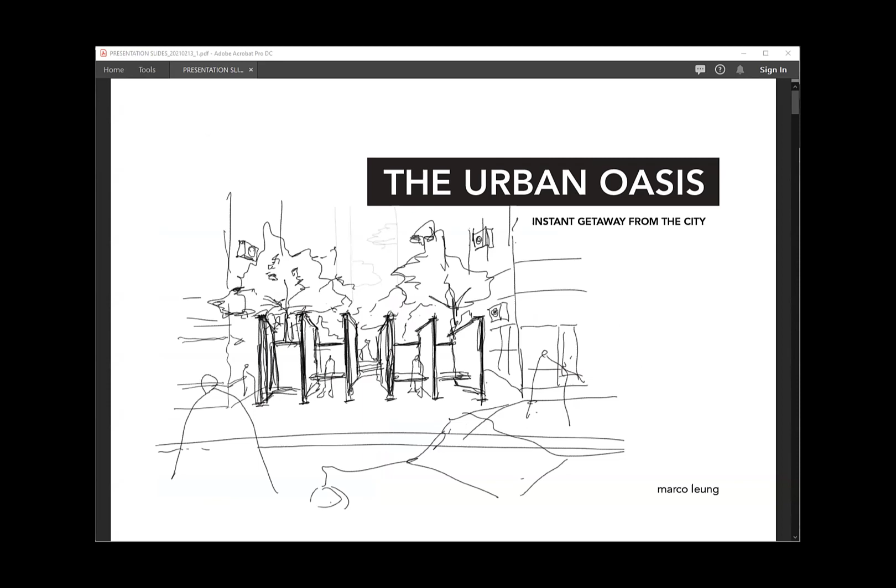I'm happy with this project since it gives me an opportunity to look into creative solutions for some spatial problems in Hong Kong, which have been on my mind for a long time.

Green space is precious in the urban context of Hong Kong, and yet to me, most of them didn't function well as a respite in the city. The chosen site is a good example of this issue.

For people who aren't so familiar with Hong Kong, this is the map. The marker indicates the location of the site, which is also one of the most high-density areas among others.

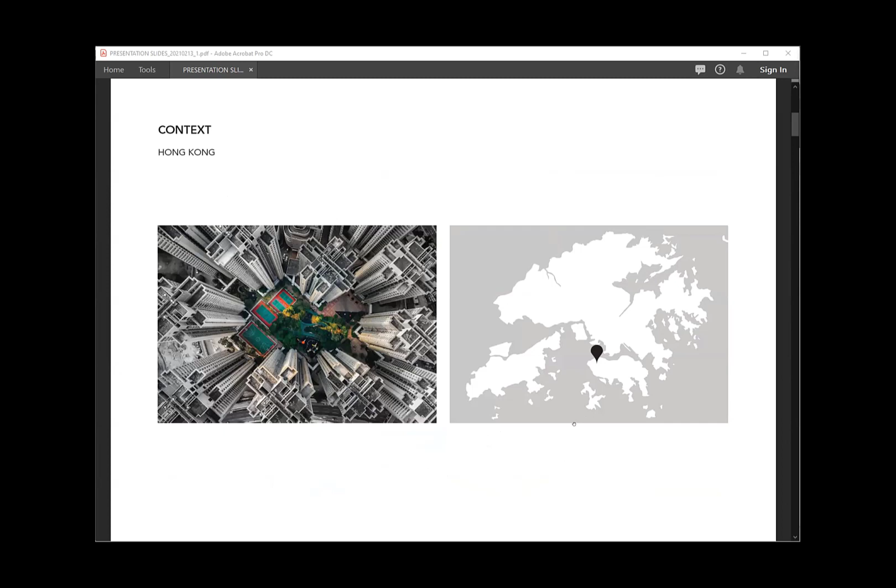The first thing about the site is it's surrounded by buildings 100 meters or taller in all directions, and the site suffers from a lack of daylighting.

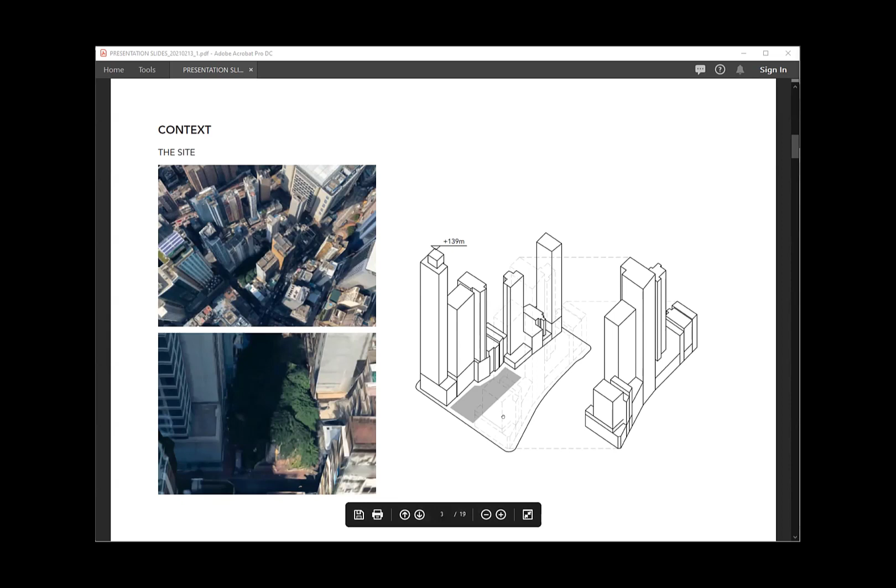You can see how the existing park is situated within the building lot and surrounded by service alleys, which are the back-of-house areas of the surrounding restaurants and shops.

So the space within is a bit unpleasant due to exhaust gas, food smells, and loud noises from machines and air conditioning units, as well as traffic.

Traffic from this road nearby, so it kind of feels like this.

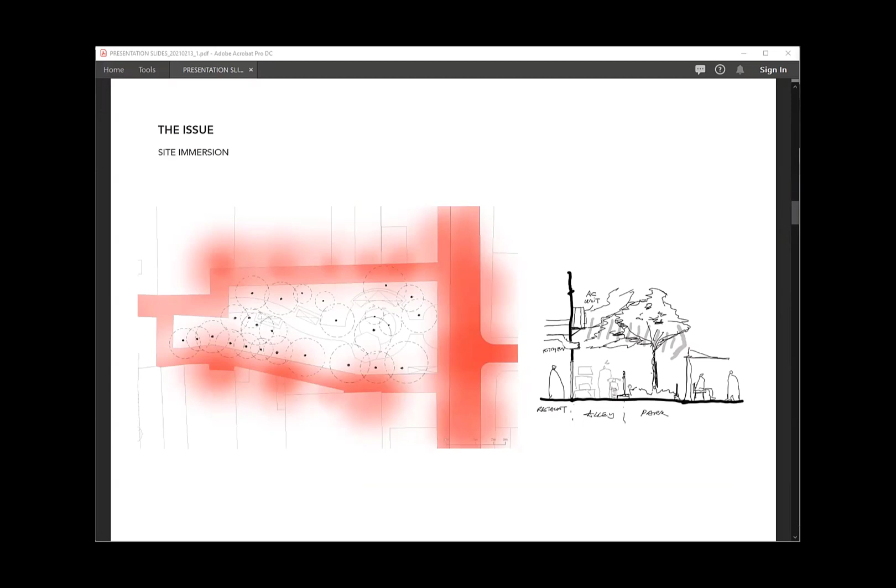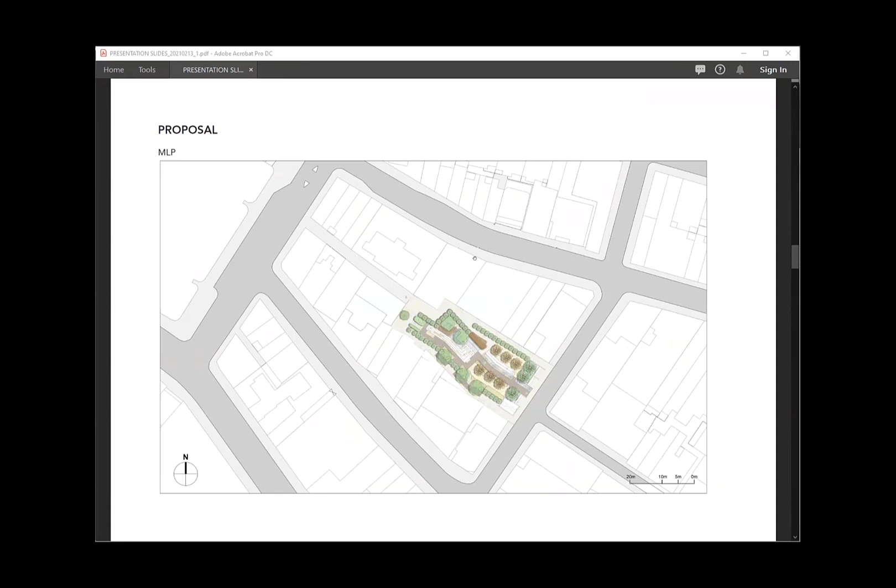I named the project the Urban Oasis, since I want to create a space for people who live or work nearby to have an instant getaway from the city in their daily life — a place which is calming and where people could experience nature within a 5 to 10 minute walk.

The first strategy is to create a more enclosed park which shields or screens the unpleasant elements out of the park.

Another thing is I want to introduce an element of mystery within this small and very challenging site.

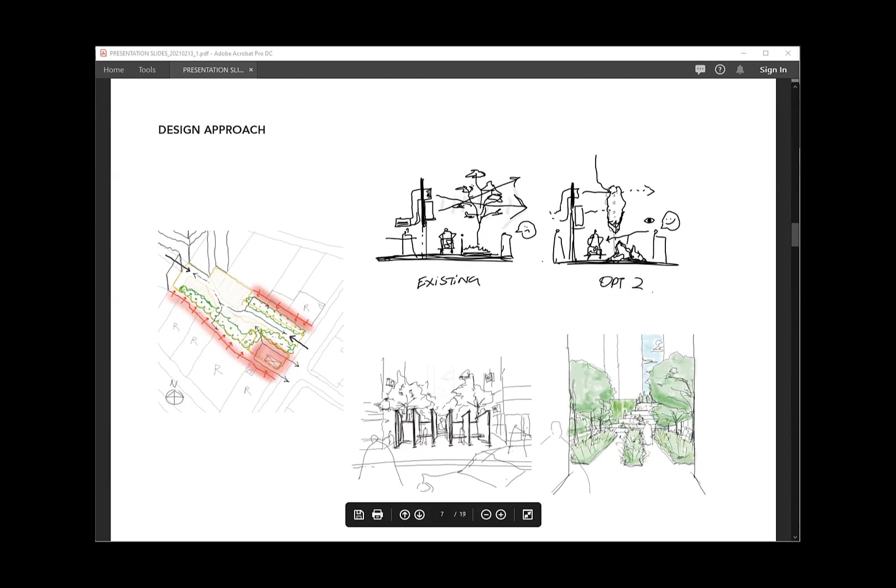I want to create more small spaces where people could wander in or get lost within this park.

Before talking about the layout, I want to talk about the two main built structures which help me shape the space. One is the cubicle, the other is the steps.

The cubicle at the entrance helps enclose the garden and break down the space, and the grand step provides a more dynamic experience as a focal point, offering more choice of places to sit within the park.

You can see this area is where people can park their bikes underneath this big structure.

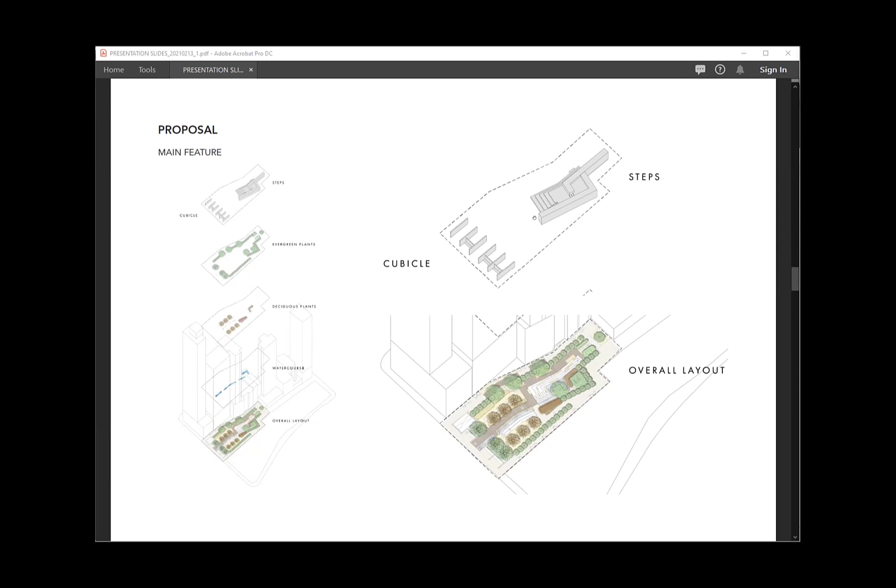Another thought is that when I'm on the site, a feeling of being in a well, very depressed, occurs because I'm surrounded by all the tall buildings.

So I'm thinking of breaking down the space by lowering the ceiling with trees and creating smaller rooms with partitions and plants, in order to humanize the space.

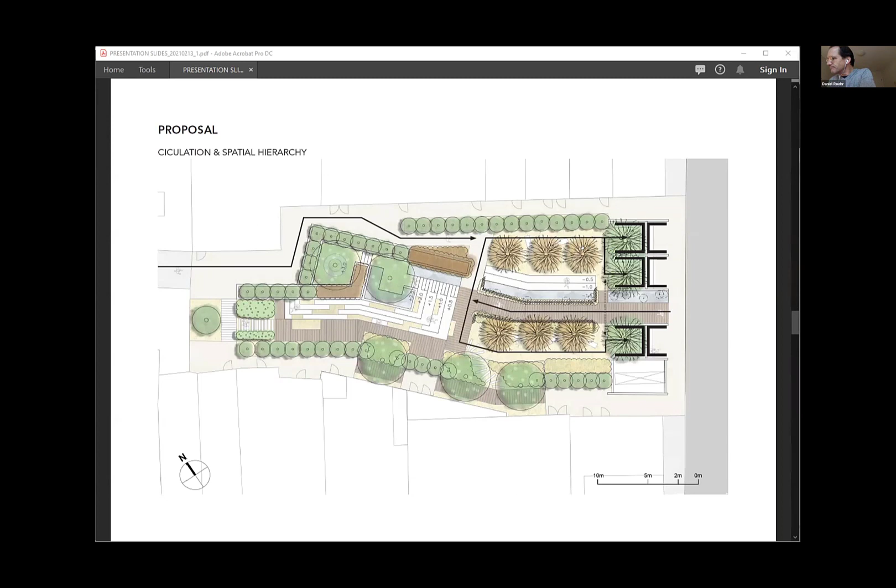Here is the entrance park, and people come from this direction, as well as from the alley at the end.

I chose two types of plants for the barrier and the screen. You can also see there's a punctuation at the end and at some places along the alley to add indirect access to the park.

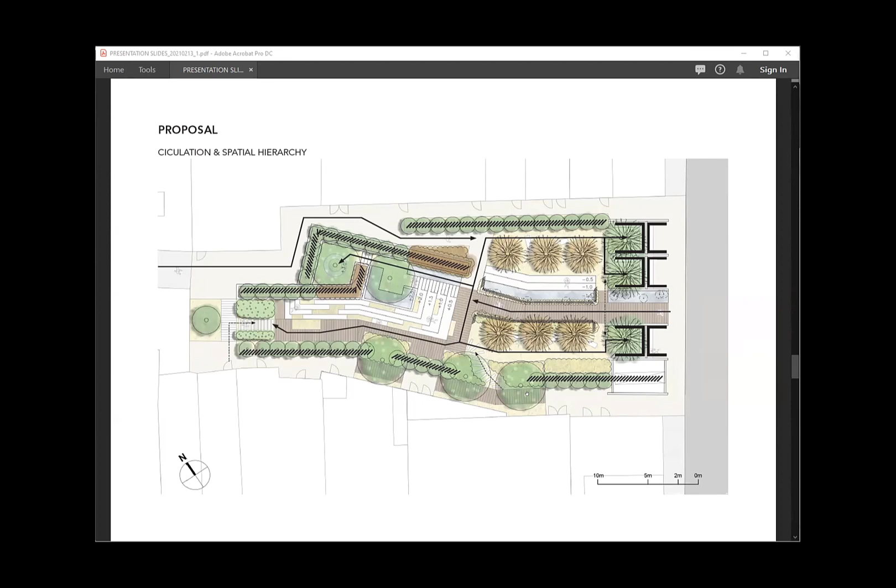The cubicle visually blocks the very crowded and noisy street from the outside, forming small spaces where maybe one or two people with their friends could sit inside and have a more private area.

The tree I've chosen is the Madagascar almond, which has a very architectural appearance, since I wanted it to have a good look from the outside.

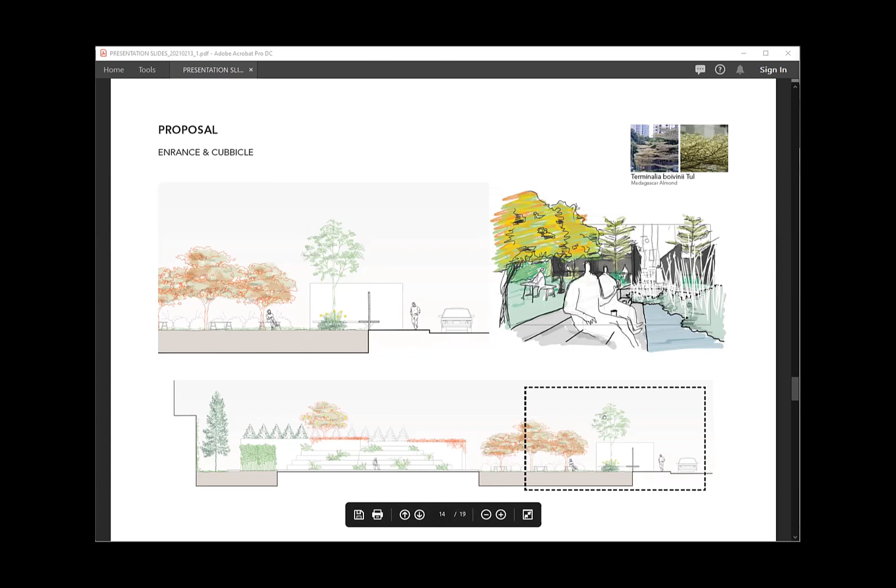For the water feature part, you can see it in the section. For the spaces next to it, I chose trees with thicker, lower foliage to create a cozy sitting feeling under the tree.

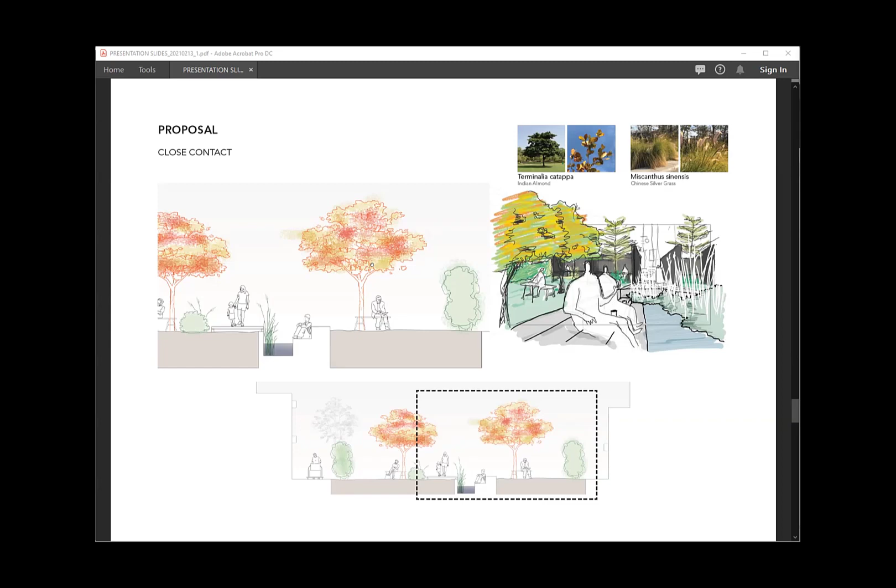When people walk to the end of the park, you can see the grand steps. I wanted to create a submerged feeling with some tropical plants, which don't require much lighting.

At the end, there's a bamboo corridor, which is the indirect access, giving a feeling of getting lost in the forest or being surrounded by the park.

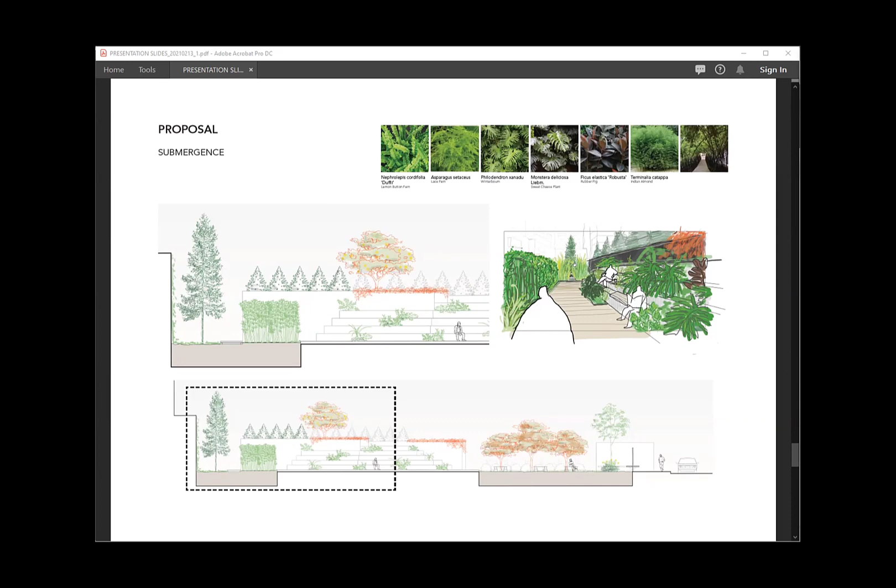This is the plant palette. You can see some yellow to red colors — the red mostly coming from leaves and shrubs in the fall and winter — and some evergreen trees with yellow flowers blossoming in spring and summer, giving a seasonal change of color.

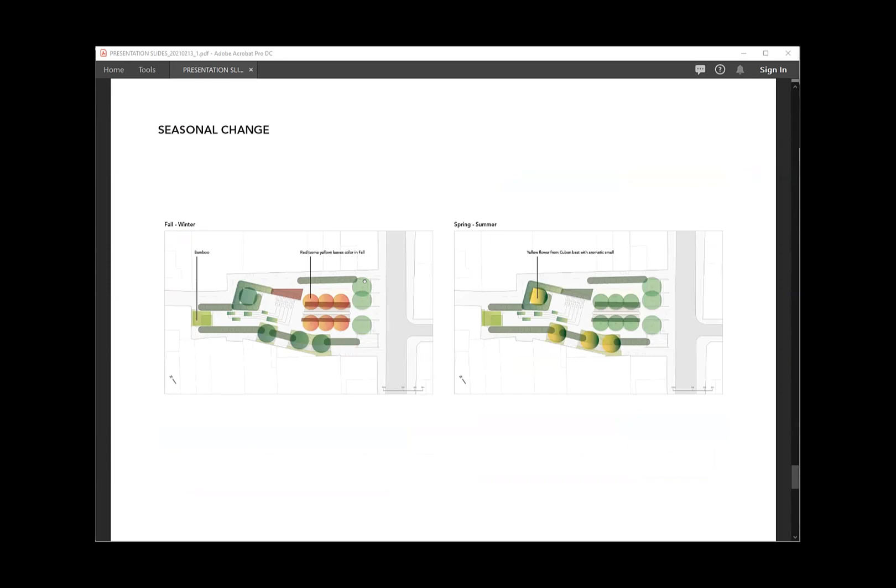So that pretty much sums up the design. Thank you.